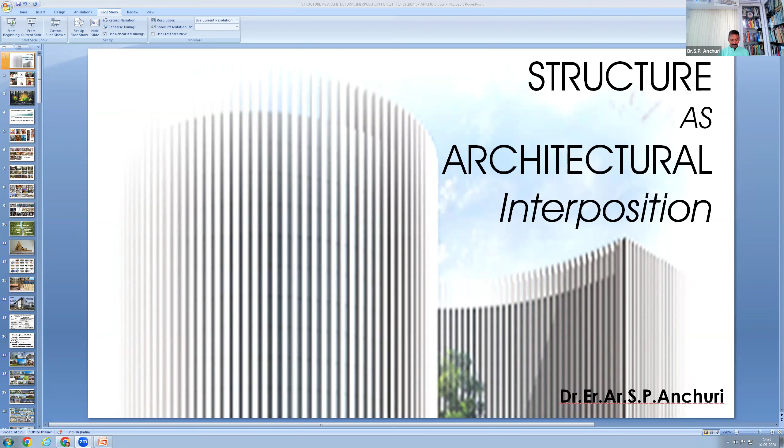But we'll try to understand how the things go. But we know, friends, this is the season of webinars, and the reason behind this particular topic is to create fusion between architectural and structural fraternity, to clear out some kind of confusions which normally we come across several times. So how this goes parallelly, let me try my level best to make you understand about this, because I work in the same field since long. And when it comes to, let me change the slide.

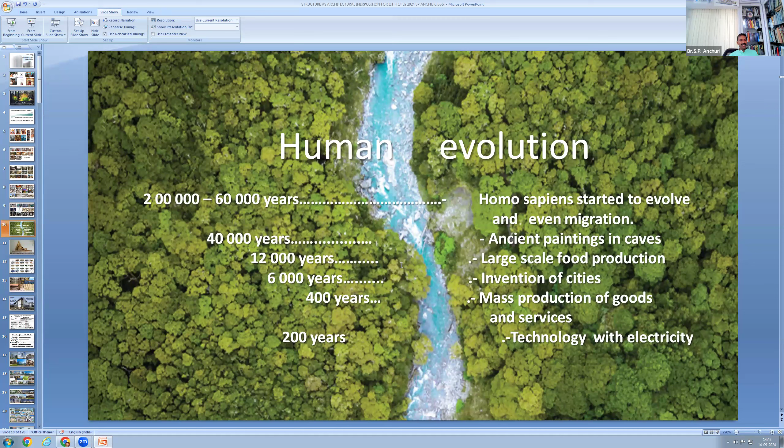Today we are in a different mode. 200 years back, technology came with electricity, but today we have everything e-logistics, everywhere. The evolution, it's an e-evolution today, but we have the challenges.

But basically, when you go back, you can see one temple in Thanjavur. It was about the 11th century. The great Chola king Raja Raja Chola built this. Just see who were there. The Agama Shastra was at its peak, and then how the construction happened. Today we are talking about technologies, material, and all that.

But can you imagine? These things were beyond imagination. There was no gadget, there was nothing but the master builder, the passion, the skill, the interest, everything was different. So we need to understand, we need to take a lot of things from the heritage and ancient buildings, which will help us go into the future with the latest things available, the contemporary, but with the heritage.

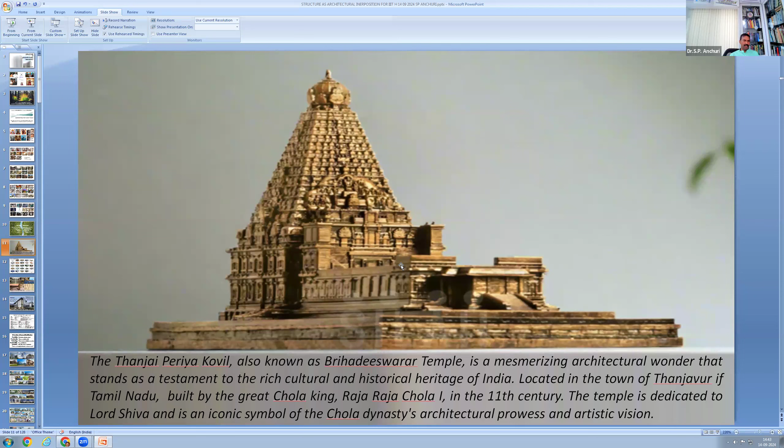So the scope, size, and design of our living habitats started about 25,000 years back, with some kind of painted caves, as I said. Now today we are in buildings which are printed. These are 3D printed buildings where there is no form required.

The days are not far away. You can print a statue, you can print a building, you can print anything. The moment you think it, it can go to the machine and then it can start printing, and within less time you get it. Naturally the challenges are there. We should be more attentive when these things are coming.

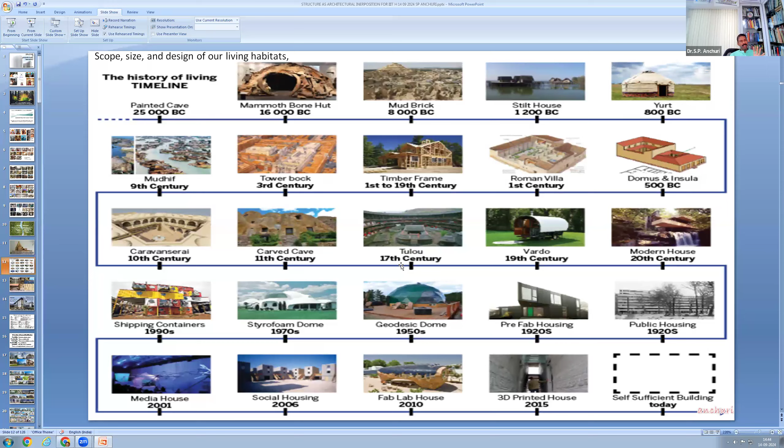So one way we are talking about reaching Mars, and on the other hand, we don't have a common normal drainage system in front of our house. So there is a contrast. We need to balance that, and we need to go for a different kind of world together.

But coming to architecture, friends, for me, architecture is the art and science of designing buildings and other physical structures. And when it comes to structure, it is an integral part of designing architecture. No doubt, the synergy between structure, form, and architecture makes the space creation structurally strong, stable, functionally optimized, and aesthetically pleasant. So we need to understand the structure.

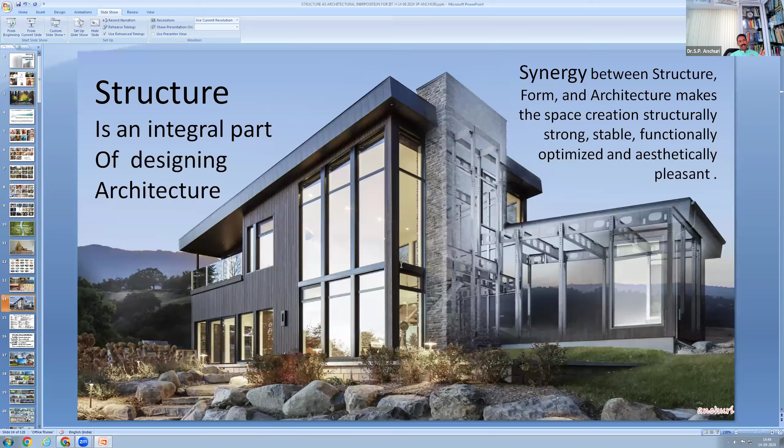Now, when you talk about civil engineering, from the basic first year to the PhD level, we need to understand the element, right from the elements to the object. Normally at UG level, we disintegrate the parts of the object and try to learn each element, and then by the time we come out, we try to assemble things, and how to make that object is very important.

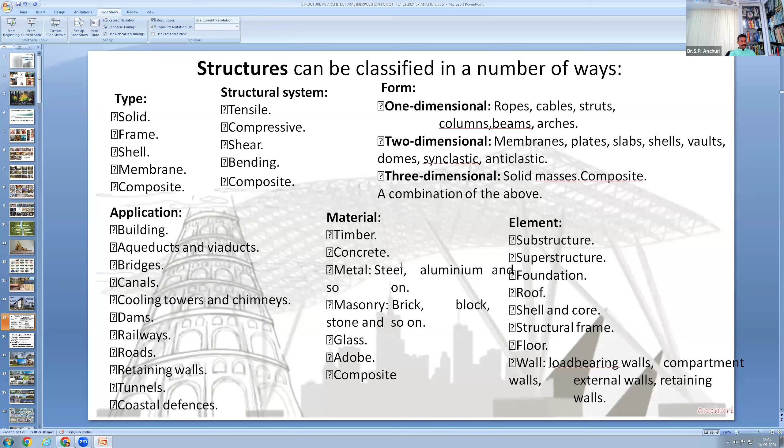So then the life cycle starts right from planning, designing, execution, operation, and maintenance. Based on the types, structural systems, forms, that may be one-dimensional, two-dimensional, three-dimensional, or the application of material or elements, we have various types of structures. So what you will normally be learning in your syllabus, and then when it comes to analysis, design, and how it will be made, that depends on this entire process.

But for me, as an architect and structural engineer, the form is in between. In fact, when the dot travels, it becomes a line, and when the line travels, it becomes a plane or surface, and when the surfaces or planes come together, that creates a volume. That may be a building enclosure. When we are talking about the building, I'm talking about the floor, the sides, the roof. Then we need to have fenestration based on the functional requirements.

So friends, the five elements, like Mahapanchabhutas in nature: the feasibility is the starting point of the project, functionality is the space used for what, the technology is the engineering of buildings which has endless options, the sustainability is the need of the hour, and the innovation is the design, shape, and construction.

But friends, for me, the correct is beauty, but beauty is not always correct. We must understand this, because only aesthetics is not correct, only stability is not correct.

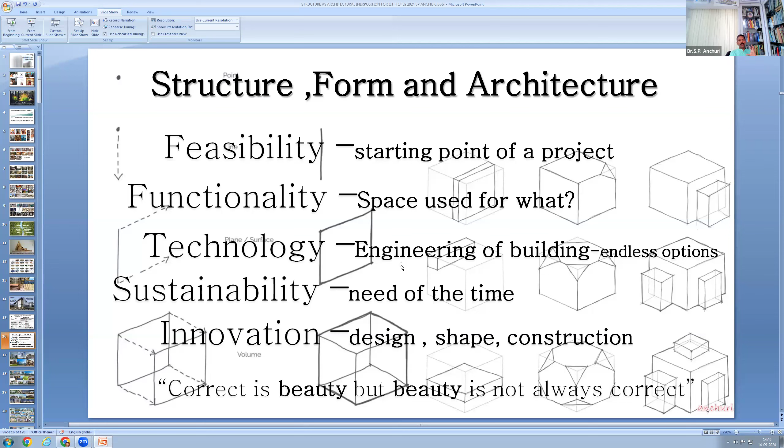We need to have everything there. I think we need to have interposition, and these are very few projects which I could be involved in. So just to have different ideas, I'm just showing it.

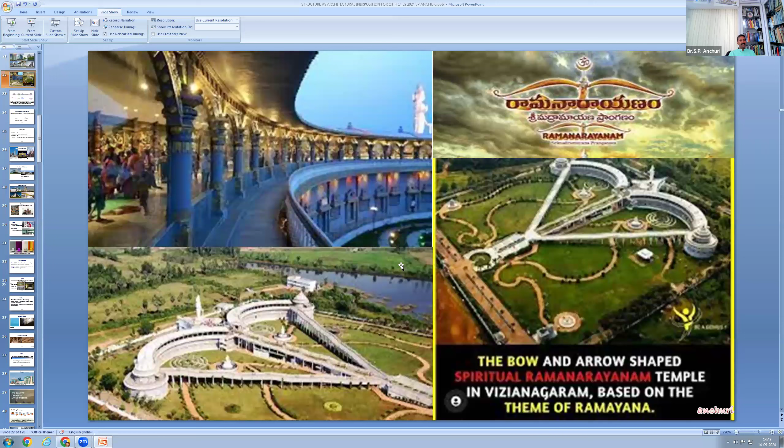Based on the scope, we had our service in these projects. There are different kinds, even when it comes to the mythological parts, and this was one of the favorite projects - my entire family was involved. This is called the Ramanarayanam, situated in Vizianagaram. It's a different theme park where structural engineering, geotechnical engineering, building services, and the mythological Agama Shastra all came together, where the Pathshalas are there. It's not a school which is a modern engineering college, but there we have the saints and others. It's a different type of school and a Gurukul. So a lot of things go here as an integration, and we learned a lot from this particular project, which we did about 20 years back.

Now friends, design is to design a design to produce a design. The design is the ability to imagine that which does not yet exist, to make it appear in a rigid form as a new, purposeful addition to the real world. So designing is to initiate change in man-made things.

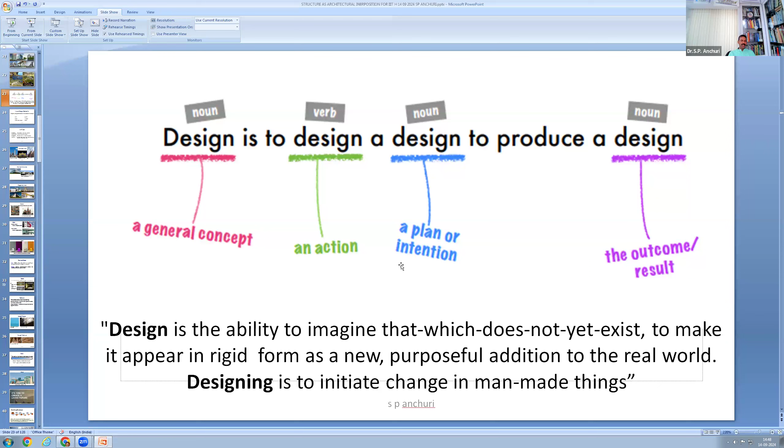I will start with the very basic elements because we are all structural engineers here. We know the bending moment, shear force, torsion, deflections and other things from one side of the coin. But basically, how does the thinking process start in the architect's mind when he starts creating something, because everything is mathematics, whether it's a calculation, creativity, or putting any line.

So here, the integral components used in the creation of design - one must understand this. Even if you are not involved in the design process of architecture, you need to understand how the process starts, because it starts on the paper or from the mind. It's a brainchild. So even though everyone is involved, it starts through the mind of an architect.

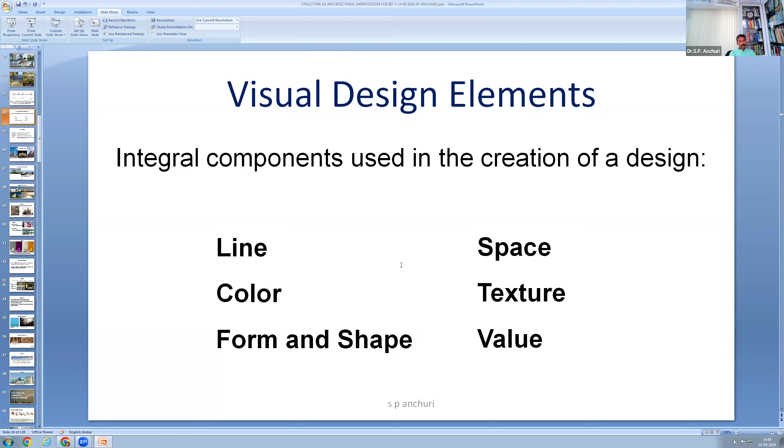He thinks of line, space, color, texture, form and shape, and value, and how that impacts. Definitely it impacts. Something vertical represents dignity, formality, stability, and strength. If something is horizontal, we feel it's calm, peaceful, and relaxing. If something is diagonal, it represents action, activity, excitement, and movement. And the curve gives freedom, which is normal and natural, appearing soft and soothing to the mind.

Does this really happen? Yes, surely. Even if you wear a shirt with horizontal lines, you will appear fatter. And if a fat person wears a shirt with vertical lines, he will appear thinner. So it really matters, and the same is true for buildings.

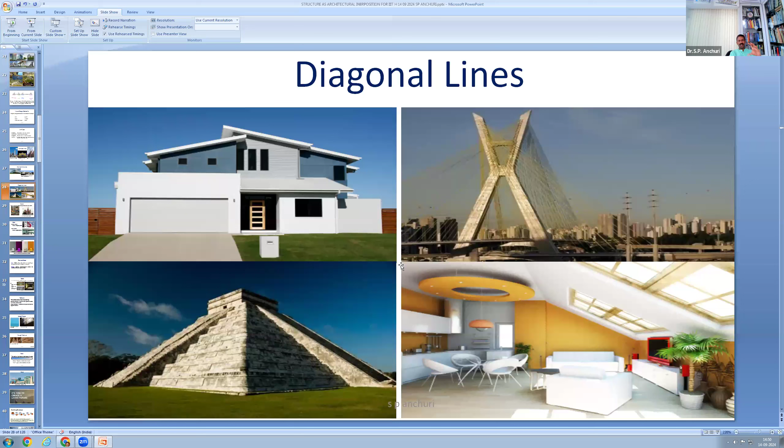Now, color has an immediate and profound effect on design. Even if I wear a yellow shirt or a radium color shirt, that definitely matters. You have to see where you need to have that particular color. White color reflects, black color attracts, and heat increases more. So we need to understand it's not only about visual appeal or efficiency, but it impacts our mind also.

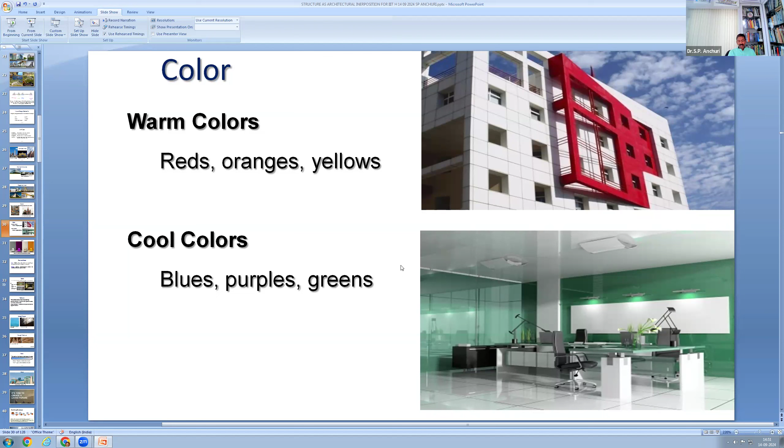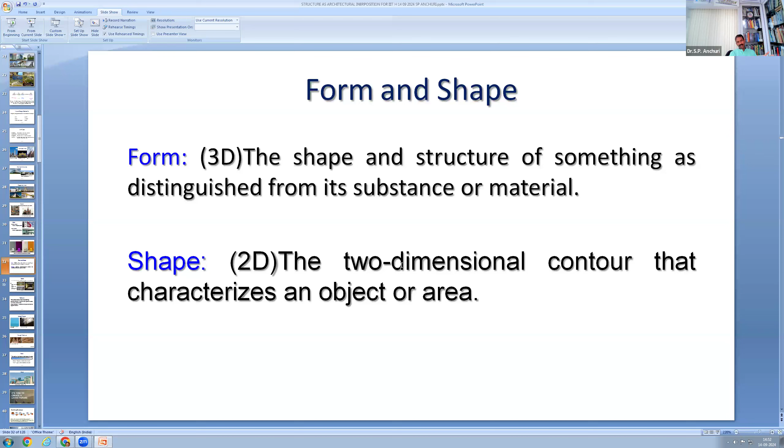The space, when it comes to space, yes, it's open or cramped or unusual. So somebody wants column-free space, or somebody wants columns based on the need, that we will see a little later. But the space really matters when it comes to design.

The texture also matters, whether it's smooth or rough. Definitely that matters, and that is part of the design and the requirement. If smooth structures and smooth texture, when you see glass, naturally it is smooth, and the external metal facades we are seeing today, there are about 70-80 types of facades that have come. There are different varieties of facades, some dust-free, some reflective, and many other types that are also part of the structural system when it comes to the glazing facade.

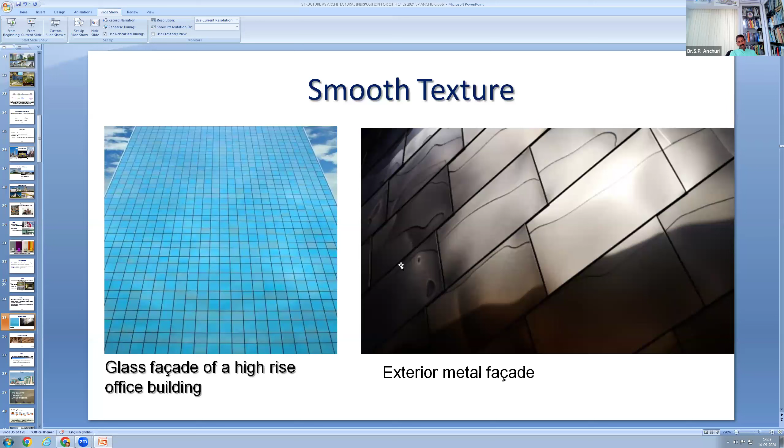And the rough textures—if you use stones, or different tiles, or laterite, the feel is different. If you use granite, it's different. So the processing is different. So textures also play a vital role.

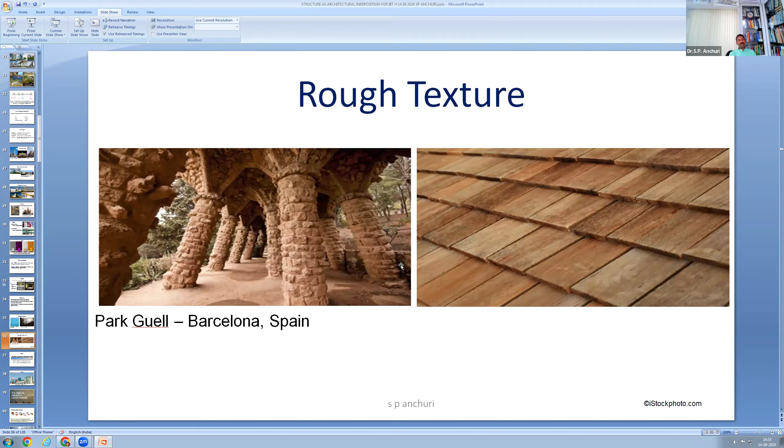Now, coming to the presentation, it's time to create a living future. As I said, post-pandemic, the thinking process is different. We are talking about living—we are staying indoors maximum, whichever space we are in, we are health conscious, we have a different productivity consciousness. We never thought we would be speaking virtually, isn't it? The technology has made us explore more, at the same time there are some limitations, but everything comes under the envelope.

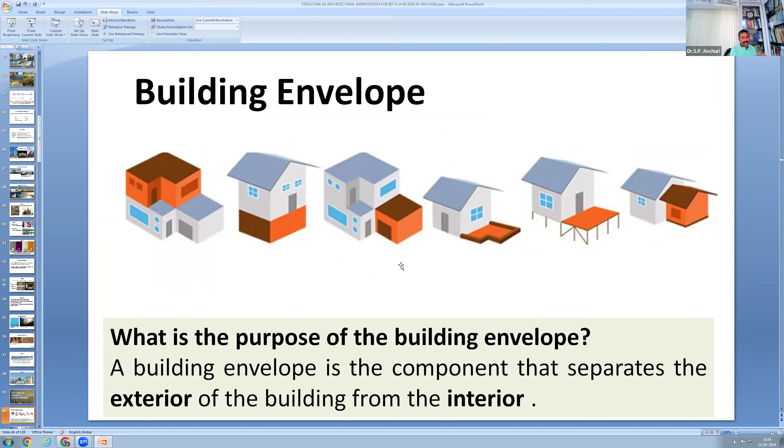Now I'm very particular about the building envelope, because what is its purpose? We know a building envelope is the component that separates the exterior of the building from the interiors. That is what the enclosure is called. It makes a very important role because that is the separation, and there are two stages.

The first stage is to understand the environment—what is the surrounding of the building, where it is located, whether it's Kashmir or Kanyakumari or East Mumbai or the northeastern part. So we need to understand the humidity level, rain level, wind level, sunlight and noise—entirely different. Delhi can't have the same building as Hyderabad or Tirupati, or Kolhapur is entirely different from Varanasi.

So I think that is the first part, and the second part is the size, type, and material of the building envelope. For example, we need to understand the vernacular architecture. If I'm constructing something in the northeastern side, and I think of a concrete jungle there, it's going to have a very adverse effect. At the same time, we need to understand the local materials—that is what greening and sustainability matters, right from the foundation to the painting, every element should be thought through accordingly.

The building skins influence our emotions and behavior within an urban landscape. You go to the newborn, so-called mushrooming cities with glass boxes, and you can never identify or judge whether you are in Hyderabad or Noida—the buildings are going to be the same. But we need to understand the local architecture, we need to understand the heritage there, we need to integrate that into the building.

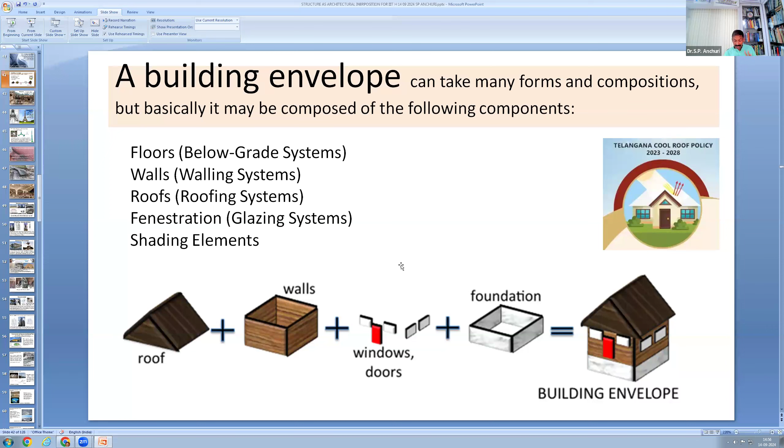Now, when it comes to tall buildings, the non-structural elements are also important because they are all architectural elements which can create a lot of problems if something goes wrong in terms of wind or seismic events. It's not just about saving the structure, but the safety of the people. So we need to understand and integrate both.

Architects normally visit these sites and they know the history of architecture - who designed that, how the concept went behind it. This is literally lacking to some extent in structural engineering or civil engineering, where we hardly go into the history of civil engineering or buildings, how that particular phenomena came about, how the design-builder approach was. Today we have all these different people, but at that time only the master builder had to do the entire thing.

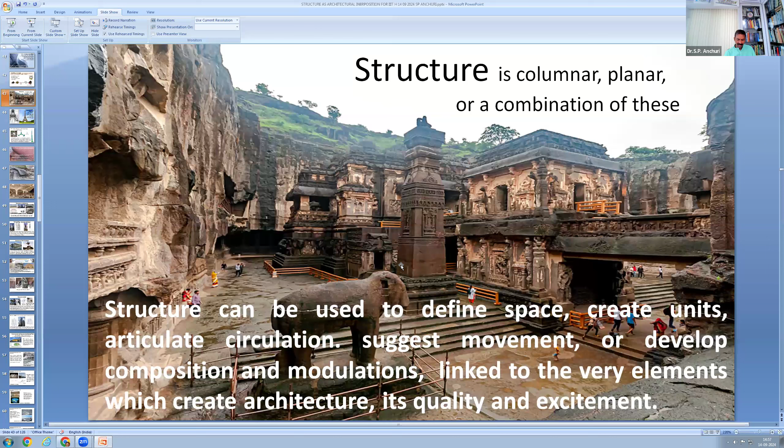So here, when it came as an isolated way, I think we need to come together again and understand how things go about. There are many types of structures, one of which is exposure of the structure. You can see how structure plays a significant role in shaping the quality and experience of architectural space.

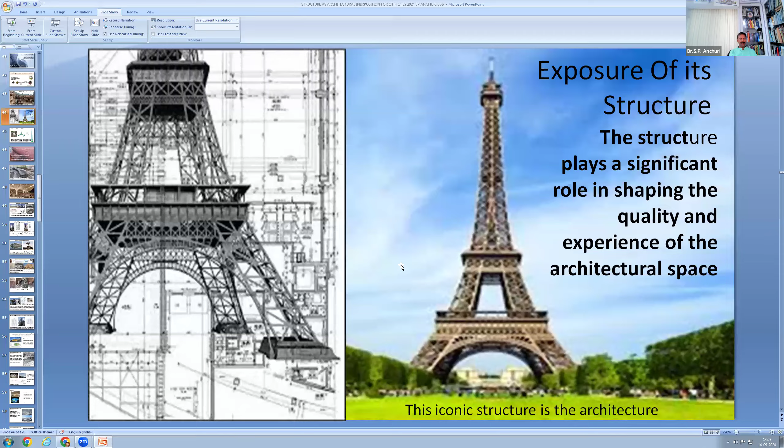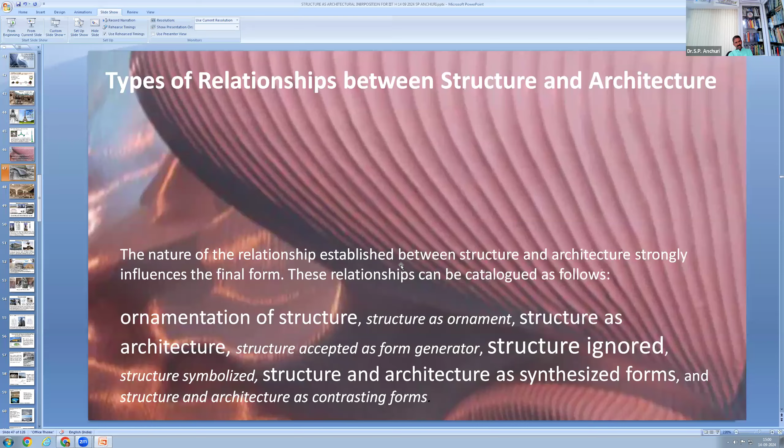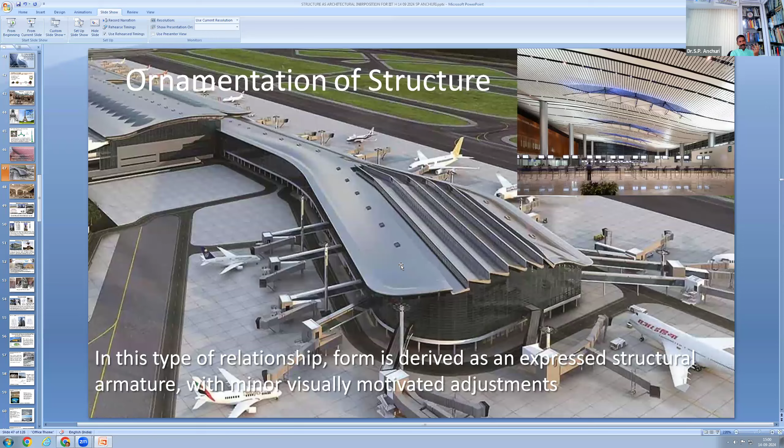We'll see quickly what these things are. When it comes to ornamentation of structure, you can see modern buildings - it's not that only ancient buildings have structures integrated with architecture, but present buildings too, even modern amenities like airports and other things, are integrated. In this type of relationship, the form is derived as an expression of the structural armature with minor visually motivated adjustments. So everything is not structurally involved, but some kind of excitement and different requirement brings ornamentation - so structure as ornament.

You can see this particular Mumbai airport recently. The relationship features a design process driven by visual rather than technical considerations, focusing on the visual quality of structural elements and attempting to give them visual prominence within the architecture. So it's a very phenomenal and important example, eye-catching and impressive output.

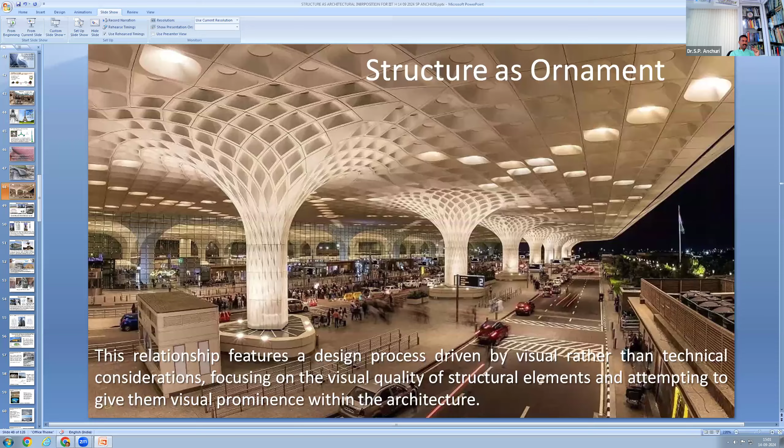Now, when it comes to structure as architecture, you can see old or ancient buildings to the new ones. All the architects doing these things were involved with structural engineers, and many of them were both architects and structural engineers, or had taken training in both. Architects used to study structural engineering to understand architecture and come together. So form-active typologies such as the compressive dome or vault and the tensile membrane are amongst the most structurally efficient examples of long span structures.

Here you can see, I like this Frei Otto concept, which was used in the stadium where he got the system of jali.

So when I was doing some initial work in domes, pyramids and Jalis, I wanted a funicular loading approach. In fact, about 12-15 years back I got a Jali made in copper, inspired by Frei Otto. I went to the goldsmith and asked for a 2 feet by 2 feet Jali mesh, because at that time digital things were not that much in practice.

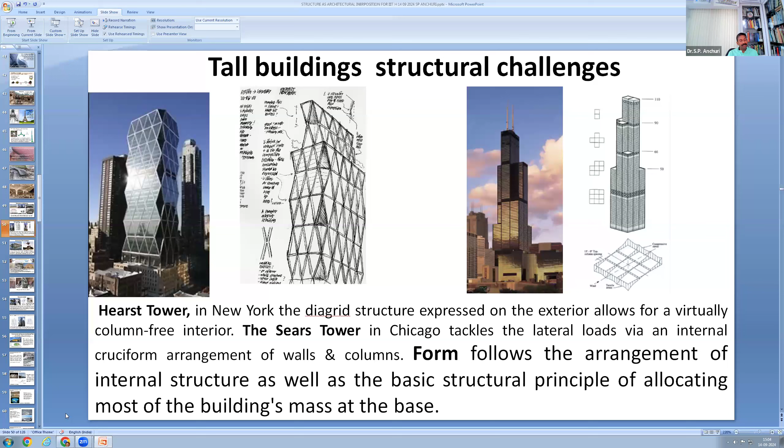Tall building structural challenges are at a different level. We face a lot of challenges because the lateral resisting system is very important - wind is dominant, and form plays a vital role. We see tall building structural systems right from bundle tubes to diagrids and so on. But we must understand that whenever an architect evolves a form, the structural engineer must be involved right from day one - otherwise that form will not be efficient, and even form generation is not possible.

In fact, I love exposed concrete structures and facades where the structure itself is exposed. Today if I do something and close it with cladding - high pressure lamination, paper lamination, aluminum composite panel or glass - I'm just closing it. I have beautiful eyes and eyebrows, and I'm just putting on a shade. No doubt it looks good, but it's not impressive - I'm not connected with you. If I have spectacles, I'm connecting, but if I have shades, I may look like a hero, but it's not approachable. I don't have any connection with common people.

So when Le Corbusier came up with his building typologies, many of the buildings were exposed, and at that time he could achieve that. So the form is generated based on the structural requirement or structural inputs.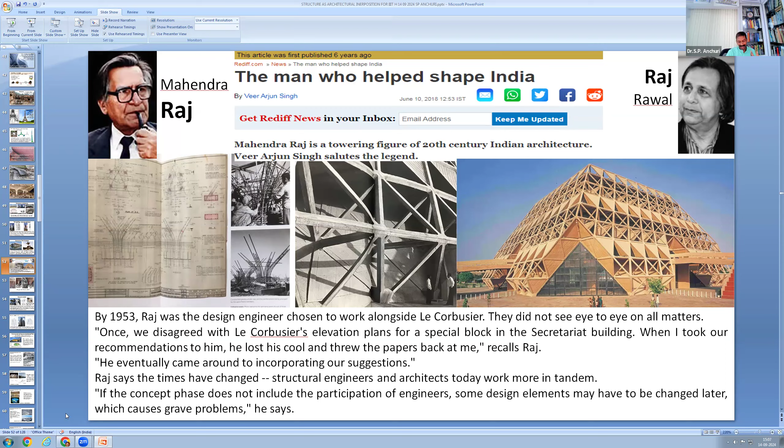I was fortunate to see the bond between the structure and the designer. I visited the Hall of Nations before its demolition. You can see how Mr. Mahendra Raj is touching the body of that Hall of Nations. I saw tears in his eyes when he was going away from there. He was saying, my structure, my building's body is going to be taken - it's not going on its own, but we are killing it, or removing it.

He was emotional, and in fact, I was also emotional. That is the bond between the structure or the architecture and the designers. And we too should have that involvement.

Every project of ours, every built environment of ours should have, we should put our soul into it. But today the irony is, even though the designer passes by his building, he can't even identify whether he has designed it, whether it's living, whether it's giving any result, whether the occupants are happy. But I think we need to go back and understand that the structures are ignored. These are examples of the structures ignored.

But friends, today we have computer design, which opened the new chapter in formal exploration with works from architects like Frank Gehry. I know he used to just take a paper and do like this, and then say, 'This is my structure.' So the formation of the generation was entirely different in his projects, where the structures were ignored. But the required things were done by the engineers and made that happen, no doubt.

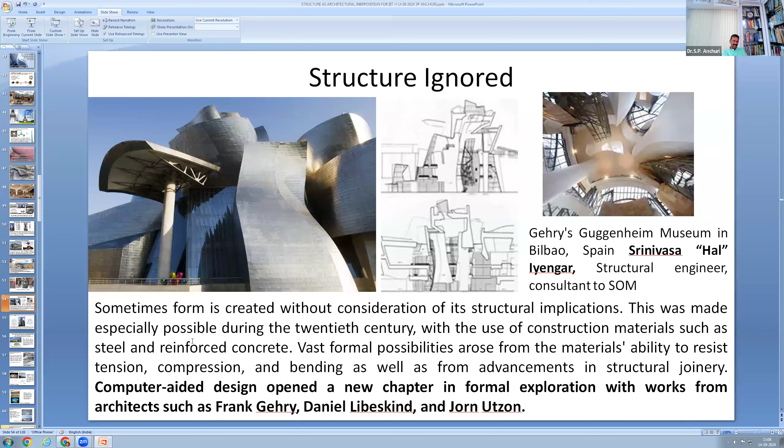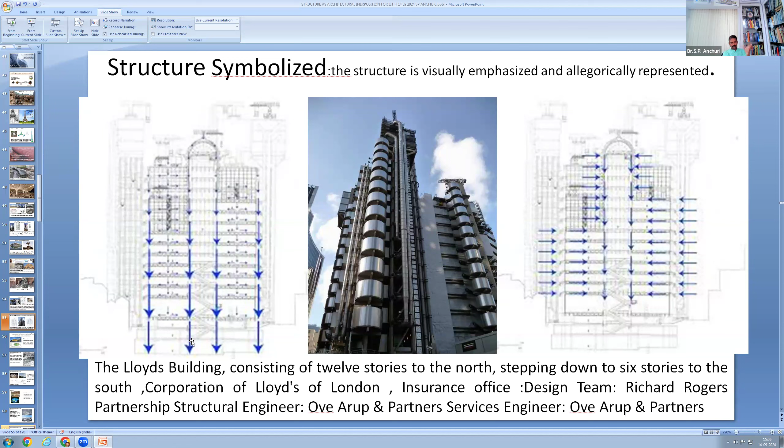The structures symbolize. The structure is visually emphasized and allegorically represented. Here you can see in this particular London's Lloyd building how the forces go to gravity, and how the lateral resistive systems were designed. So here the symbolized structures, we can see how that building resulted.

So here the structure and architecture are synthesized forms. The coexistence between form and structure is important, whether it's a statue, a chimney, an airport, or any building. We need to understand these forms and structures. There are 7 to 8 types predominantly. Quickly I will go through them.

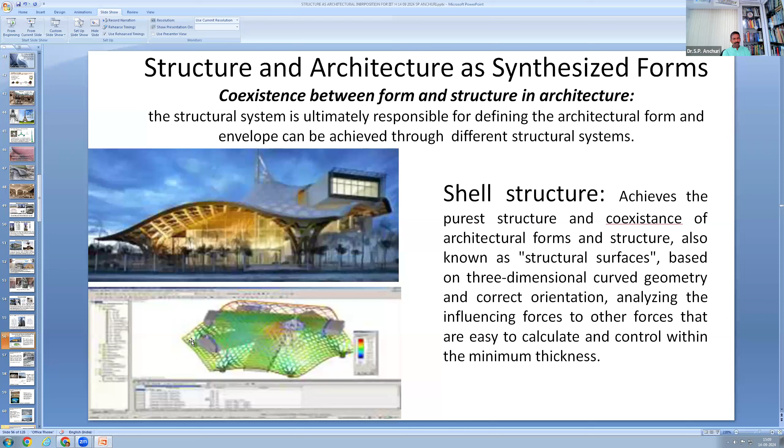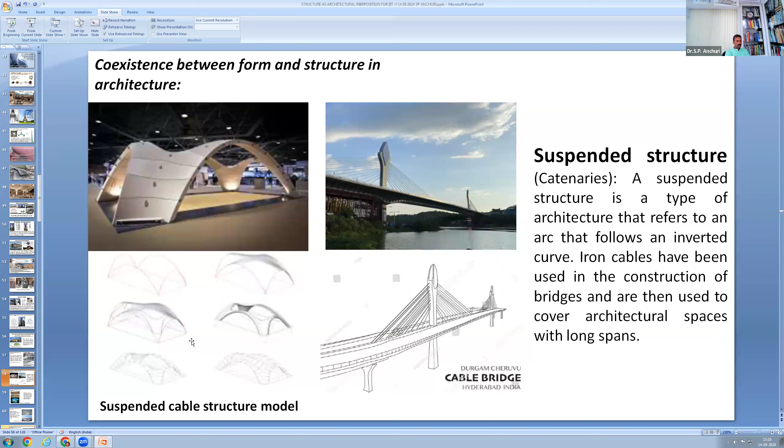These are the tensile ones. And here we have suspended structures, whether it's some kind of a convention center or a cable bridge. This is our Durgam Cheruvu Hyderabad cable bridge, which is one of the best in its kind and category. So a suspended structure is a type of architecture that refers to an arc that follows an inverted curve. The arch we'll see a little later, but the suspended cable structure model is one of the coexistences between form and structure.

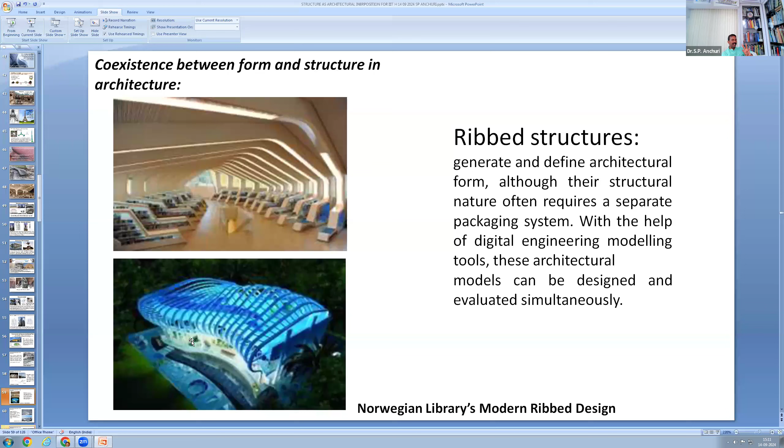The ribbed structure generates and defines architectural form, although its structural nature often requires a separate packaging system. With the help of digital engineering modeling tools, these architectural models can be designed and evaluated simultaneously. You can see how these ribs have been used, right from the roofing to skylighting to the seating and the library. So it can be interiors, architecture, structures, and everything integrated together.

Now, when it comes to frame structures, the tectonic pillars, a network of beams and columns that are connected to form the structural frame of a building. And here you can see many examples, including this airport, and the new Adani's Chhatrapati Shivaji terminal. These are all these kind of frame structures.

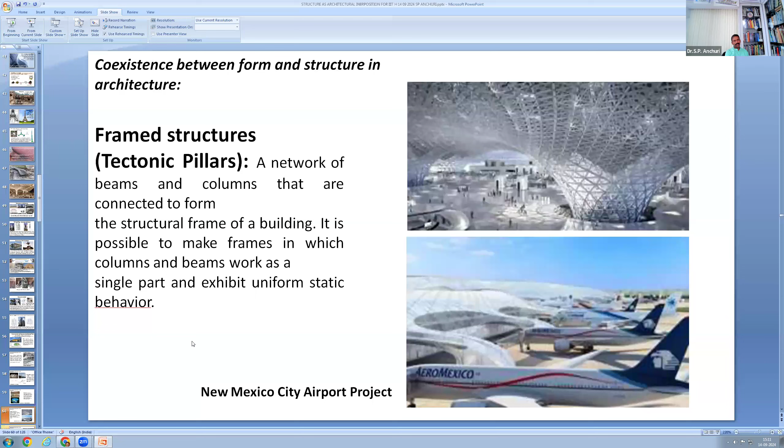And when it comes to folded plates, the potential of folded plates can be demonstrated simply by taking a paper and folding it, then putting it in place. That takes the load, and it's a very simple thing. We need to sit together, the civil engineers and designers, and then decide what kind of roofing system we can have, what kind of forms we can have. This can be a very phenomenal, optimized structure if you do it.

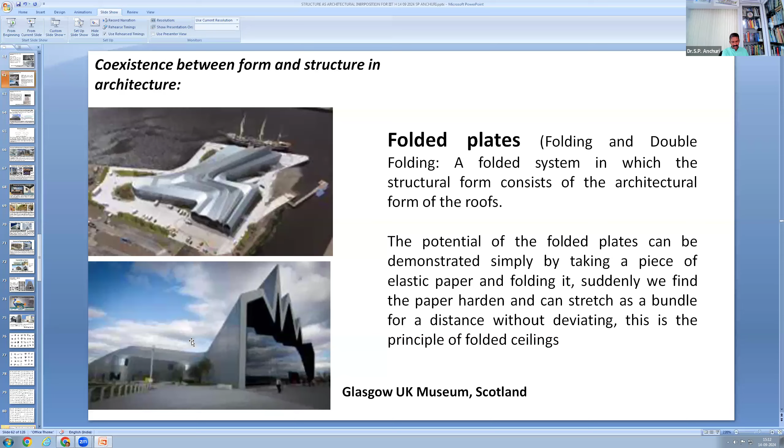So tectonic walls are also very important, which integrate the structural systems and the formal characteristics, the external envelopes and columns. You can see how this school building gets the light, and then you have a composition of whites and opaque things.

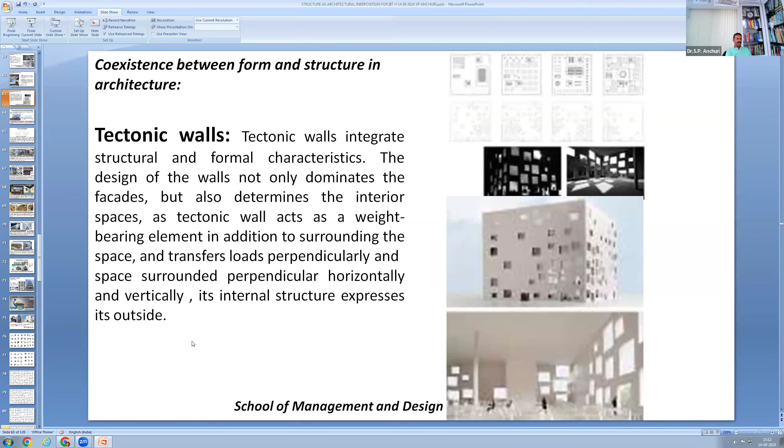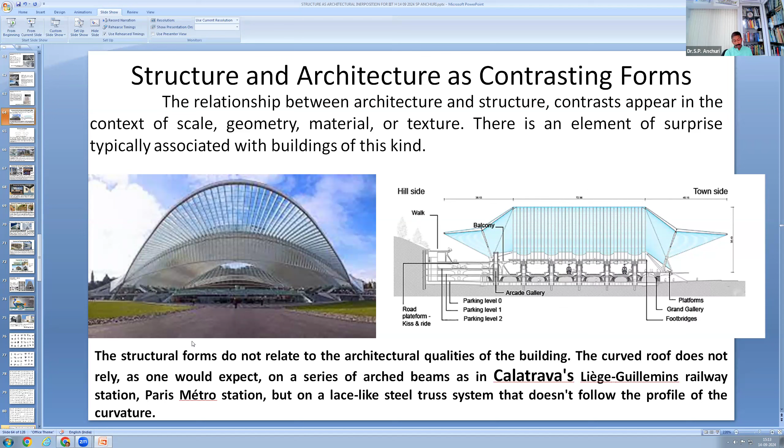It gives a different feel inside, or a bit different atmosphere inside. It's not only the architecture which can create this, but the combination of both gives something very, very different. That is what interposition is, which is positioning where the structure and architecture can be in a contrasting form. The relationship between both contrasts appears in terms of scale, geometry, material, and texture. It's not only the size and shape, but you can have different materials coming together, making a contrast, which gives a different composition throughout.

Now, naturally, thanks to all the newest technologies, you can go for long span structures where the deflection can be controlled or kept within limits with post-tension, pre-tension, precast, or some kind of high grade concrete and high performance materials. But earlier, when you see the structure in the space, it played a very, very important role - what type of structural system you are going for, and what kind of column-free spaces we are getting.

Because earlier we thought of having individual spaces, but today we have open types, right? From the kitchen, dining, living - it's open. Even offices, our IT offices are spread over. Whether it's co-working space or anything you see, it's a huge area with column-free spaces. So these things also can be done.

So when it comes to the structure, sometimes the same structure can be a disruption, and sometimes it looks like an enhancement. You can see this Lyons School of Architecture, where even though those things are obstructive, they enhance the feel. But when it comes to the right side, that academy, those columns - even though that is structurally sound and stable and looks good - the disruption is more. So we need to understand this, discuss together, and go for some kind of solution.

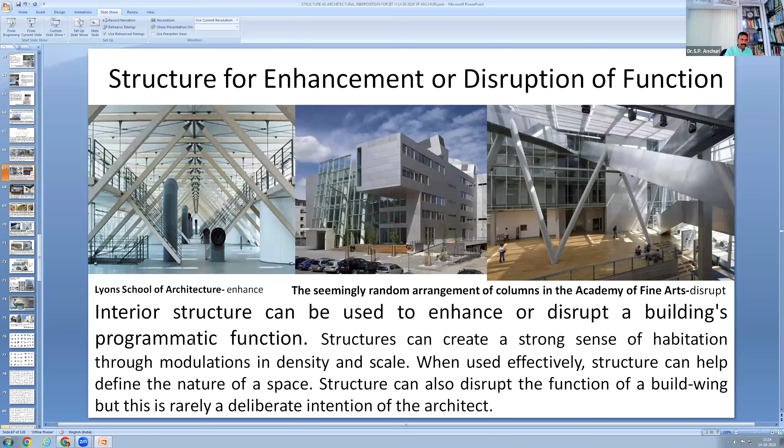But here, the structure maximizes functional flexibility with the minimum. You can see this Dubai exoskeleton structure. We have two types of structures: exoskeleton structures and endoskeleton structures. When you see the left side, we have the example - minimizing the amount of interior structure inside the building can be difficult, especially with large scale structures, but that is one type.

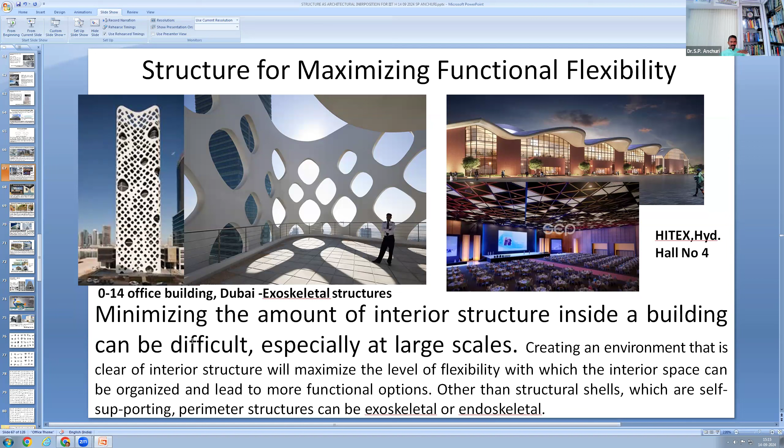And if you see on the right side, which is HITEX, we have this convention center - hall number 4, which is structurally designed by our Sriharsa consultants, our own Mr. Sridhar Reddy, who has worked out very extensively the new structural systems in steel. With this, column-free spaces, you can have this endoskeleton system. So here, this is designed by us, and in fact, this is inch by inch.

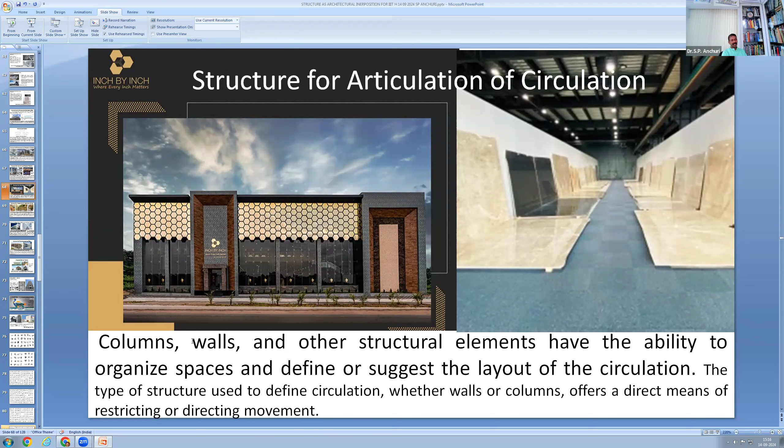When you go to Shamshabad Airport, this is one of the biggest stone or flooring showrooms, where you have very, very big slabs displayed there. So we wanted to have a column-free space. Then we thought of having a system which is an articulation of the circulation - we need to have anything, anywhere. Even cranes can move in, even huge machineries can go in, and it can have the display. So this is the need - the entire functionality changes with these things.

And if you go to the modulation of light, yes - today we are thinking of energy efficient buildings. Our connection to nature has little increased; in between, we went a little away from nature, and we can see today's impact of climate change and the natural calamities we face. I think we were a little away from nature, so again we should bring in the mindset that we should go towards nature.

And this is the example, one of the best as per me - this is the Bangalore New International Airport, where a lot of landscaping is there inside. These are all natural trees or natural greenery, providing at least the required level of sunlight, air, and water - everything. So here the structure plays a significant role in this context, especially when we consider its potential as a source and a modulator of light. When I visited last time, it was inaugurated by our Prime Minister, the Honorable Prime Minister. This space and this modulation of light is for everybody.

CM to PM—that is, common man to chief minister to prime minister—it makes no difference, no discrimination when it comes to the natural thing. That's what we need to understand and bring in, and let us enjoy that particular thing.

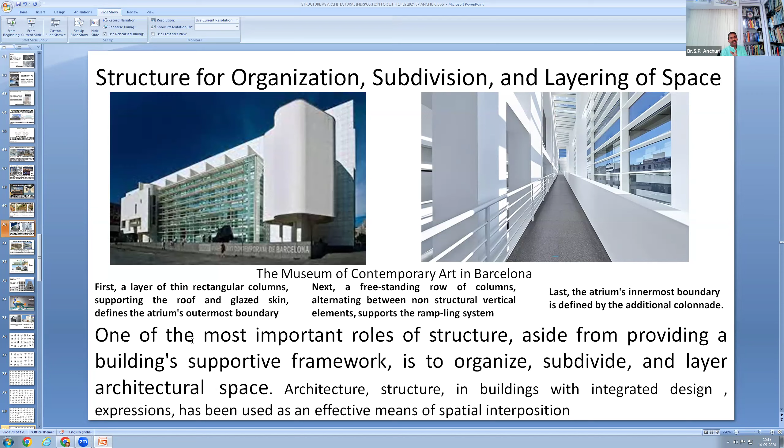The structure is for organization, subdivision, and layering of spaces. One of the most important roles of structure, aside from providing a building's supportive framework, is to organize, subdivide, and layer architectural spaces. In this building and museum, the ramp goes one way, and on the other side we have freestanding columns which give the seating areas, and in some places the same structure is part of the atrium. So the same structural system can give different functionalities. We need to understand how to subdivide, layer, or organize spaces based on that.

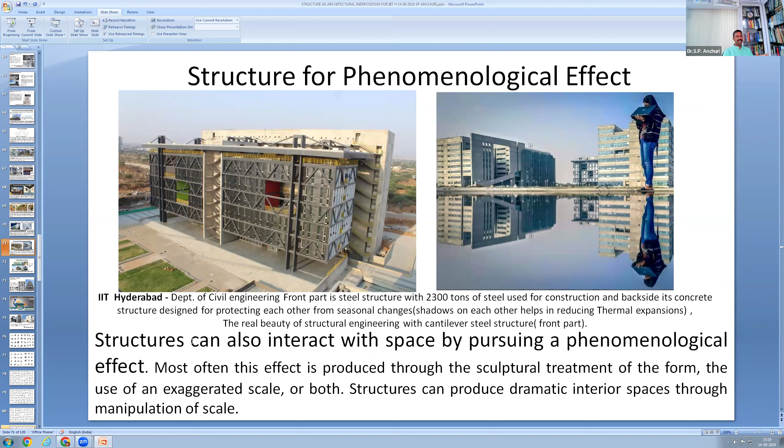This is our own IIT Hyderabad, on Bombay Highway Road—the structure has a phenomenal, phenomenological effect. This particular steel structure, and behind it the concrete structure, is one of the best examples of creating architectural effect using innovative structures. Just see the atmosphere, the surroundings there—it's not like a regular classroom, but students, teachers, and visitors all enjoy it. Productivity is higher, and it's very futuristic while keeping the energy efficiency we need. These are among the greenest buildings ever, and I think they're examples of generative structures for regenerative architecture.

This is T-Hub in Hyderabad. You can see how the structural system—the steel structure—and the cladding and cantilevers reflect an integrated design process. Here we need to integrate requirements right from IT, the startups, and the people who come there. It's not that easy; you can't have just any space for anything.

If you want to perform a puja, that's a different story. If you want to play, that's a different requirement. If you want meditation, something different again. And fighting is something else—these are all startups, so we need to create different kinds of atmospheres for them.

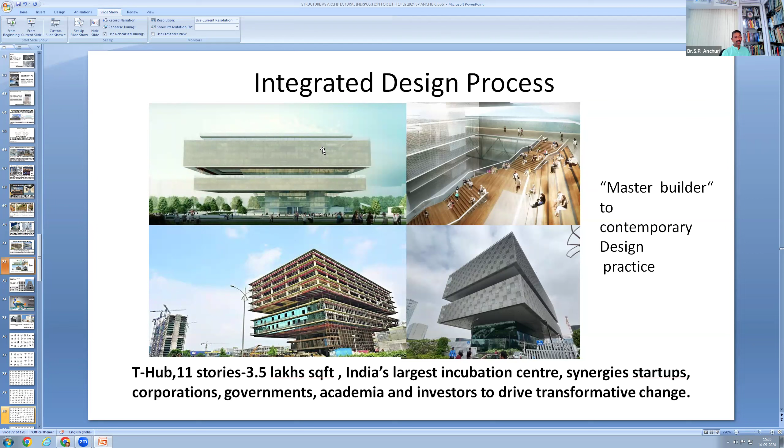So from master builder to contemporary design practice—how do you develop this? This eleven-story, 3.5 lakh total square feet T-Hub is India's largest incubation center, synergizing startups, corporates, governments, and academia, and investors, to drive transformative change. I feel these kinds of structures are the need of the hour to integrate and bring productivity to that extent. But this is not new—it goes right back to ancient days.

If you see, this is one of the temples we are constructing in Devarkonda, about 120 kilometers from here. A lot of Agama Shastra experts are involved there. As a civil or structural engineer, I provide the stability and design of the structure, but the entire thing is seen, viewed, and designed by them. So we need to support their requirements.

So when ornament and structure become a single thing, strangely enough, the result is a new feeling. This is what ornament in the building means—the ornament itself takes the load.

Quickly, we'll go through a few more slides that are left. For me, form morphology is the form and structure of anything. This morphology is very important, and it must be learned, understood, and practiced by architects and structural engineers—and in fact other domains too—to make things more sustainable.

So what is that? The account of form seeks to be a general theory of the shaping powers of organic structure. Materiality matters because today material development, industrialization, and advancement are at a different level. The materiality of architecture has determined the close relationship between design, engineering, and architecture, and so on. So we must understand the assembly of elements, which plays a vital role.

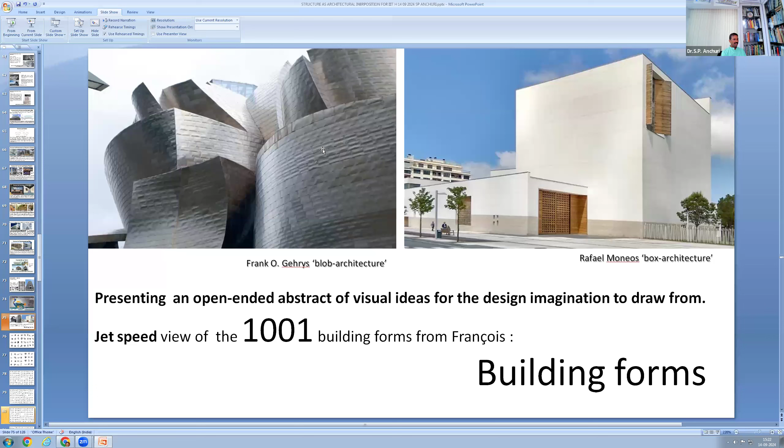I'll just quickly go through this: 1001 Building Forms by François Blanciak, who compiled it by taking different forms from all over the world—only 1001 are listed here. It's a very small size and may not be easy to see, but we'll go through it quickly. These show mobile mosaic slabs, split columns, window reels, and so on.

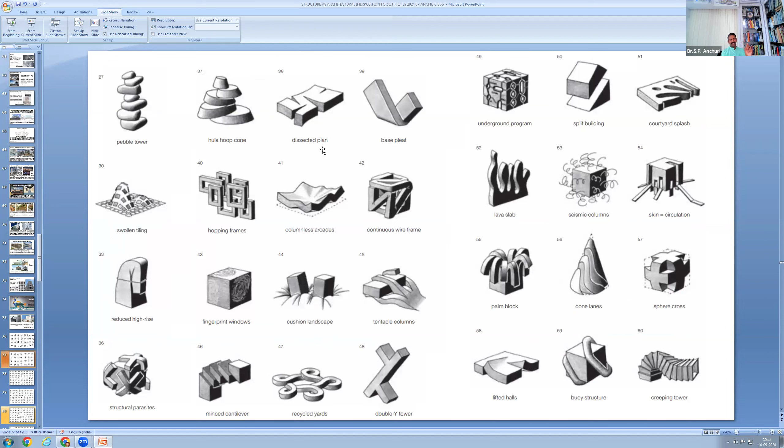See how those things were combined—what you're seeing are all buildings, themes, and different structures. That may be a monument, a building, or some kind of motif. You can see how these things developed throughout the world—even Norman Foster's building is there, and Burj Khalifa too.

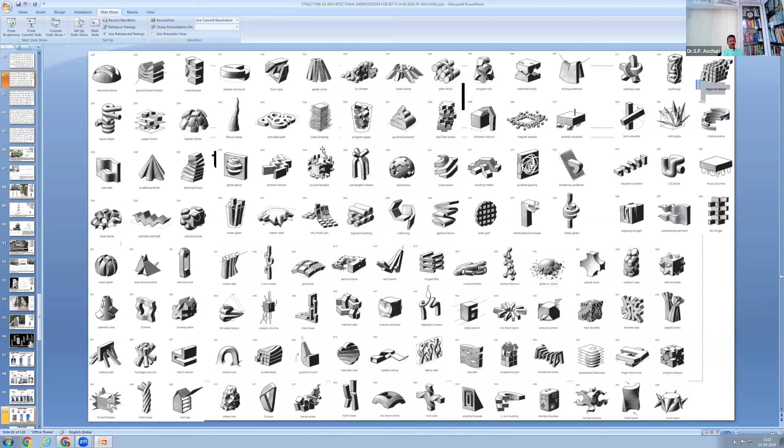Now, a few I have taken from them, and you can see how these things can be. So here the liquid landscape - there is some animation here, but I'm not doing it full screen, though I think it will not work. But anyway, I will share this with all later.

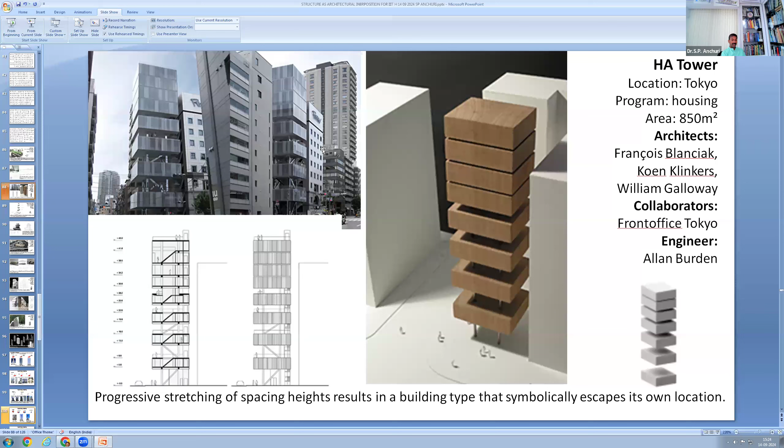So how those waves were formed. And here you can see this tower where the engineer, structural engineer, collaborators and architect were involved. The progressive stretching of spacing heights results in the building type that symbolically escapes its own location. So you can see how these variations were brought in.

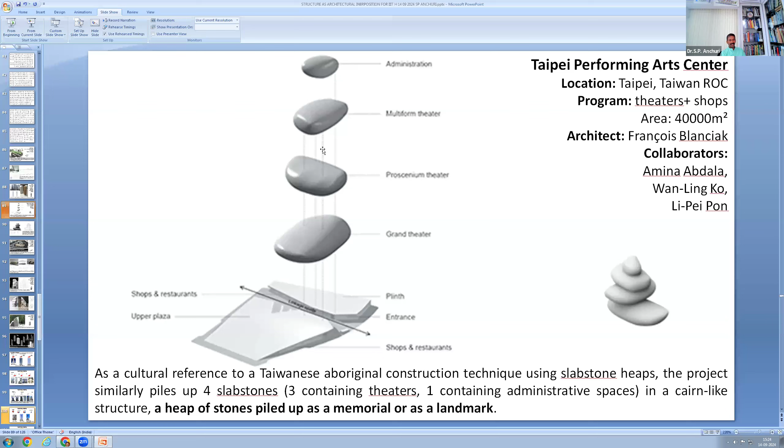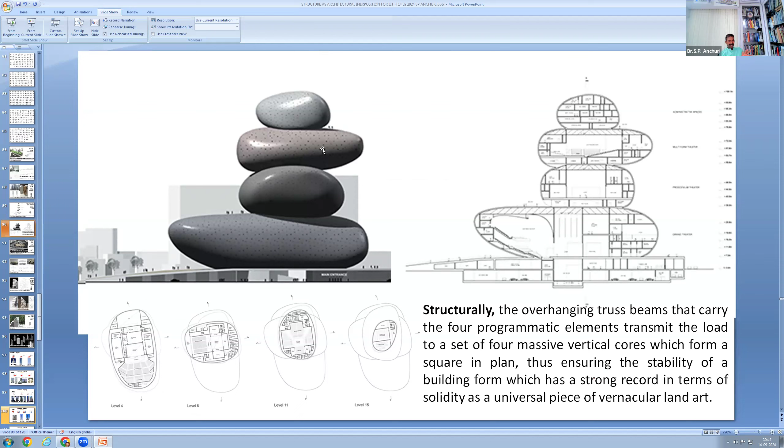So here the pebbles, how those were composed, and how the heap of stones piled up as a memorial or a landmark. You can see structurally the overhang truss beams that carry the four programmatic elements and transmit the load. So the path of the load is very important - we need to understand the structural system accordingly.

You can just see how the slices work. People can get any idea from anywhere. It's not that the architects are simple - they are very crazy, they get any idea. The structural engineers are even more crazy, they can get it done. It's not that whatever they give, these people will just do it. Synchronization is required, and then the connect is required.

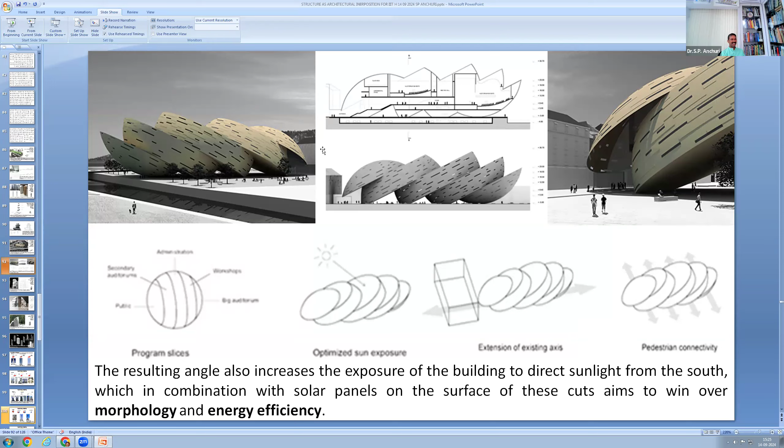Here you can see the building, the slices, how they gave, and all. The morphology is very important - leave aside the building services and energy efficiency, which are very much challenging. But still, I think people have the fancy ideas, and then they come up with these beautiful structures.

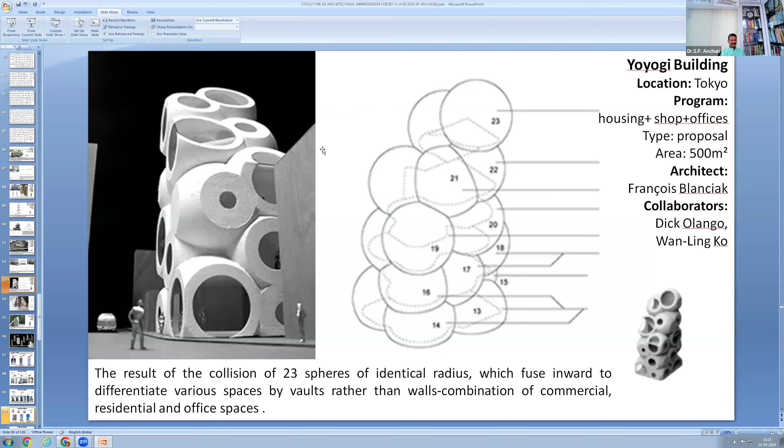This particular example is the collision of 23 spheres of identical radiuses, when those are coming together and fusing together, the productivity is something different. Now you can see how these randomly placed things form this particular structure.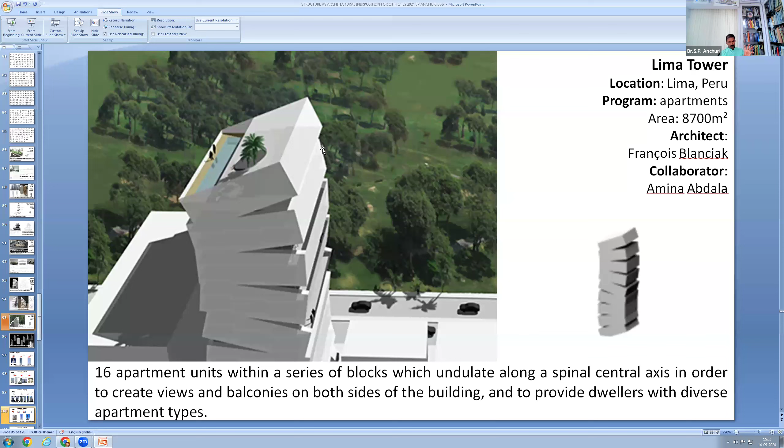Now, for example, Lima Towers is 16 apartment units within a series of blocks which undulate along a spiral, spinal central axis. Actually this has to move, but it's not moving here. But anyway, the formation of this geometry is based on that. Just see the spinal cord in between, and how those things were - outside you see the complications, but everything is on parallel. People live in that very happily.

Now, before I conclude, there are a few more slides. For structural engineers, architects, or any designer or planner, the generation of the model is very important, because today we are depending mostly on digital tools to analyze. So modeling is very important - if you don't model, how can you do it?

Another 5 minutes I will take, and I will close it. Sir, we have time - if you want, you can extend for another 10 to 15 minutes. Okay, sure, thank you.

So here, when it comes to high-rise shaping - basically when you think of any long span structure, for me the long span structure has deflection as a problem. If I go for a tall building, then sway or drift is a problem. So to reduce that, we need to have an efficient form, for more usage. Because if you study tall buildings, only 60-70% of the buildings are habitable, and above that you use it for machines, some kind of pinnacle, machinery placement, or telecommunication.

But when the architect and structural engineer and other fraternity come together and generate the form, the percentage of usage of the floors will increase. Say about 180 floors - if you can use up to 160, 170 floors, I think that is the more optimized, more efficient form for me, because you can reach that particular level. So for this, these twisters, angle twisters, or sliding twisters - they are the generators.

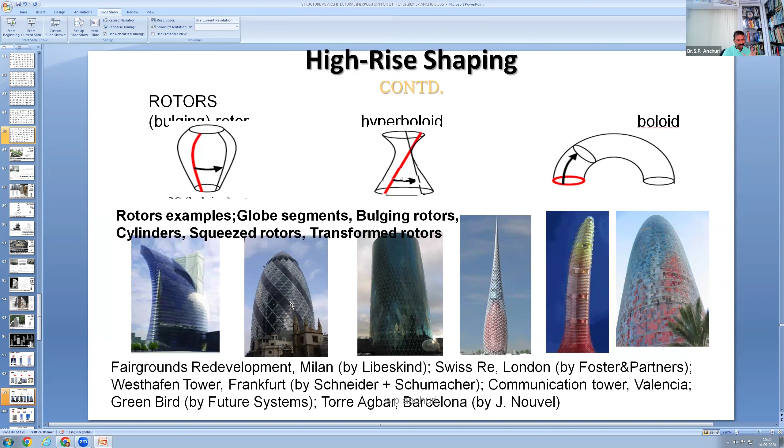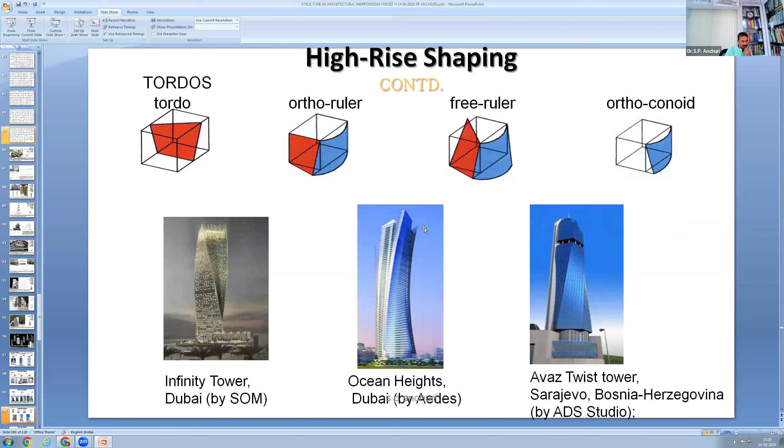So the red curve is the principal curve, and when it's rotated along this axis, it creates this particular generation or evolution of the form. It's very important to understand how these forms are developed. Once you understand this, you can model it, and naturally apply loads and other considerations, and it comes to a final result with the involvement of more than 30-35 experts. So these are the free shapers, and here's inspiration from the human eye.

Santiago Calatrava is a very different kind of person - he compares the human skeleton to animal skeletons. He was actually the brother of a veterinary doctor, so he used to observe a lot of animal skeletons. You'll find many horizontal elements rather than like our spinal cord, because animals have a horizontal structure.

So here he took the inspiration from the eye, and he created this particular Eye of Knowledge. And here the twisting torso, as I said, is his own figurative sculpture - he tried to make that. So you get the idea.

So here, even myself and people who are architectural or structural, we create some kind of different modules. But when it comes down to it, different architects and different structural engineers must come together right from day one of conceptualization on the board, so that you can come up with different ideas. If you ask architect David Fisher, he will say the same, or James Law, who works in cybertecture.

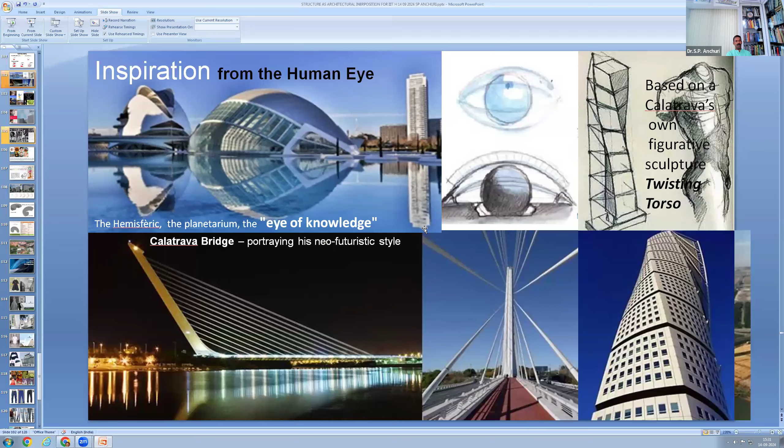So here you can see, for us, when we conceptualized this Ramanarayanam, the Dhanush and the Bow was the inspiration. This was conceptualized and approved by Bapu, the very popular producer and director of mythological films. So one thing is opportunity.

The other thing is we need to organize in a proper way, so that everybody will have their say and other things. So here I will give only one example of one of my projects, which I am very, very fond of.

This is under construction, but it's the world's first of its kind building in terms of functionality, for testing infants in terms of their hearing challenges. We have more than a few lakh infants who are not treated or diagnosed in their first month about hearing, so they can't be repaired later. But if those people come here - it's a charity trust where it's nothing to do with money - they can get the infants' hearing tested.

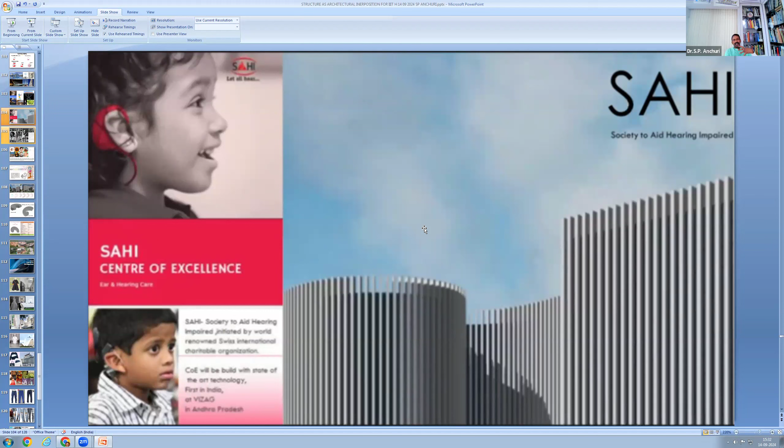So it's SAHI, the Society to Aid the Hearing Impaired - it's the world's first center. In fact, it's coming up in Visakhapatnam, and I was fortunate to do it. I had discussions with ENT specialists from various hospitals across the country, and they came up with the ideas. They are the ambassadors for this, doing advertisements, and many people there have implants also.

I got the idea from the spiral, which is the golden ratio, the beautiful asymmetry found in plants, animals, insects, and other natural structures. This mathematical phenomenon is called the golden ratio, also known as the divine proportion, the golden mean, or the golden section, the shape of the golden spiral, one of the more appealing, pleasing proportions found in nature.

That is 1.618. So the number and the ratio itself is derived from the Fibonacci sequence. You can try this at your leisure. It's a very wonderful ratio which comes out, and you can find it in the ear and everywhere.

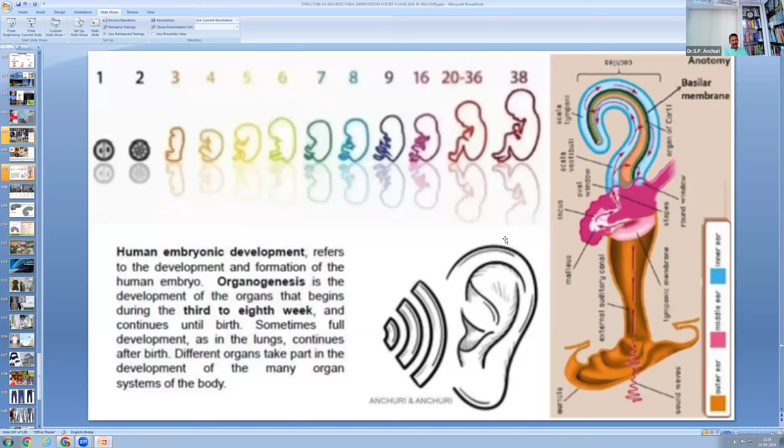So I took this concept and created something along with anatomy. Human embryonic development refers to the development and formation of the human embryo, from the first month to the 38th week, from conception to delivery. That also has the shape. Considering all this anatomy, I came up with the form which was inspired by this, and they cleared it, and this is under construction. You can see the shape itself. We felt the problem with torsion, but we could handle it with proper structural design.

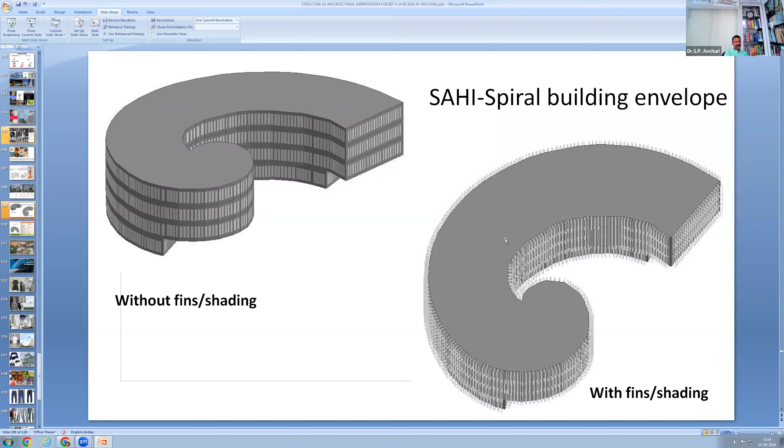Here we had versions without fins and with fins, because it's in a Visakhapatnam hilly area where the humidity level is more. So instead of a circular or another shape, this gives more shading, and we got a 6-star rating. You can see this was at the design stage, where we could analyze it using simulation software and other calculations to get 6 stars. When we started on the hill, within 6 months we could reach this stage.

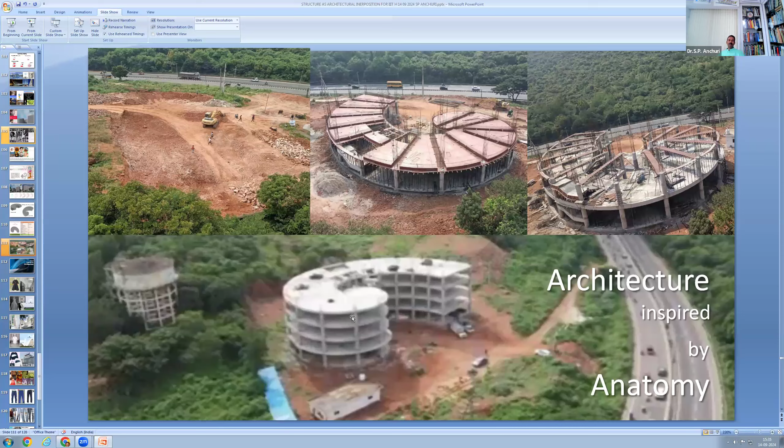So architecture inspired by anatomy, this was my case, because I always compare the human body and the building body. Just to cut the monotony, I'd like to take you to another inspired world, where architecture inspires others. It's not that architecture always takes inspiration from everywhere, but architecture also gives inspiration to others. One sector is fashion, clothing.

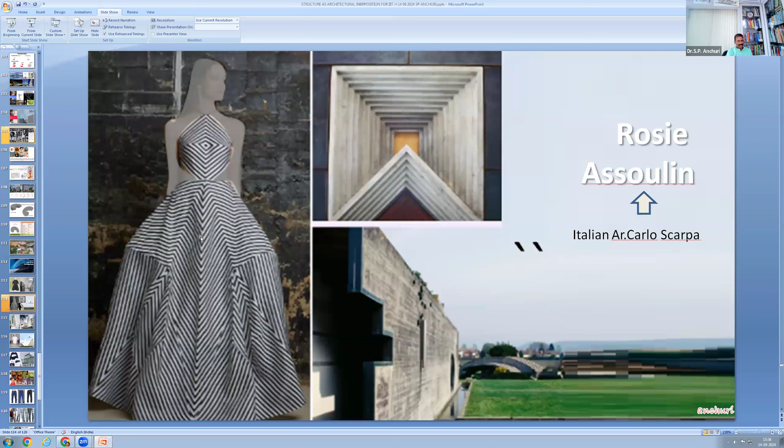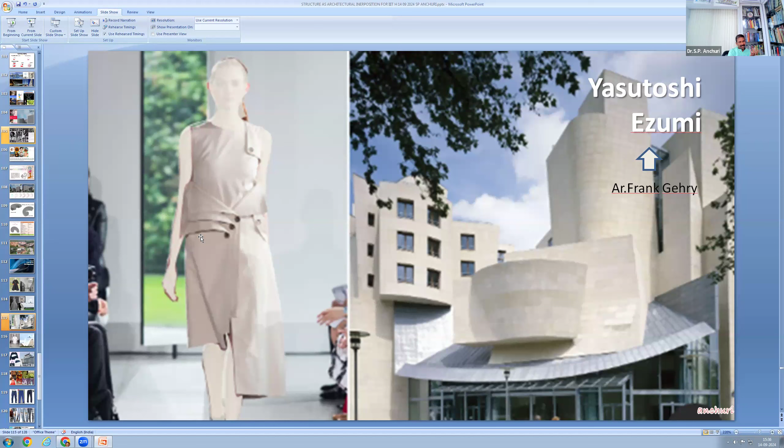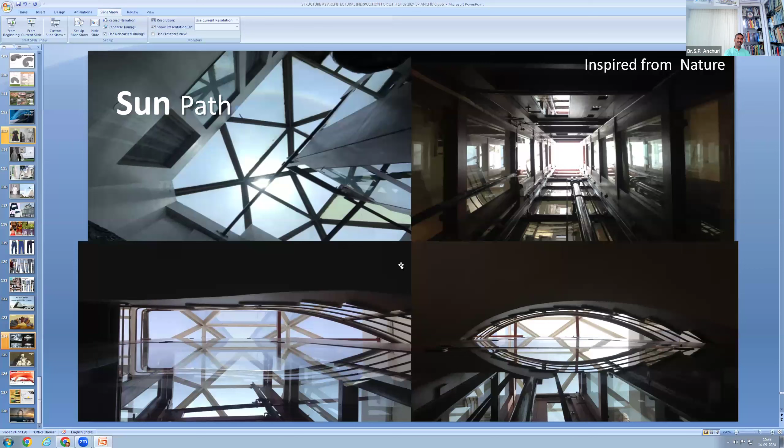So in conclusion, architecture and structure is a collaborative process. The interplay between structure and design, the layering of the process, and diverse but intertwined approaches to conceptualization, analysis and construction emerge as architects and engineers delve deeper into their foundational base of knowledge and renegotiate the boundaries between their disciplines, understanding architecture as structural imposition or structure as architectural interposition. So we can change both structure as architecture or architecture as structure. It makes no difference.